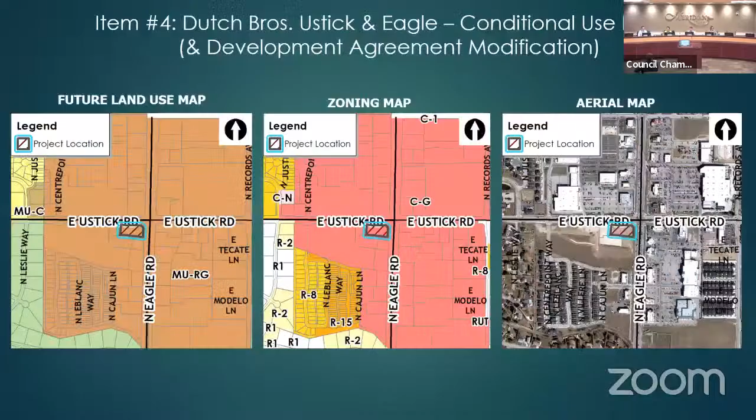Thank you, Mr. Chair, members of the commission. Happy New Year to all of you. Glad to be back here. I'm excited about all the community members in attendance tonight as well. It looks like it's going to be a pretty quiet evening, so you get stuck with me tonight. I'm covering both Sonia and Stacy's projects as they're out enjoying a vacation and a much needed evening for Sonia. She was at City Council, it was a long hearing, so I told her I'd take Cigar Canyon for her as well.

So first item on your agenda, this was continued from the December 15th hearing because of a noticing issue. That discrepancy has been corrected, and so it's back before you.

The applications before you this evening are a conditional use permit and a development agreement modification. As you know, because there is an associated development agreement modification with this conditional use permit, you are a recommending body on the conditional use permit tonight. So you will be making a recommendation to council to accompany that DA modification. This application is contingent upon council approving the development agreement modification.

The site consists of 1.2 acres of land currently zoned CG in the city, and it's located at the southwest corner of North Eagle Road and East Ustick Road.

The applicant was in front of council about 6 months ago on a DA modification, and that one was denied. That's what's predicated this new DA mod and this conditional use permit. That was one of the recommendations from city council - they had a hard time justifying approving a concept plan with a drive-through on it without having the associated CUP to go along with it to see if it actually works on the site. That's why you see both of them concurrent tonight.

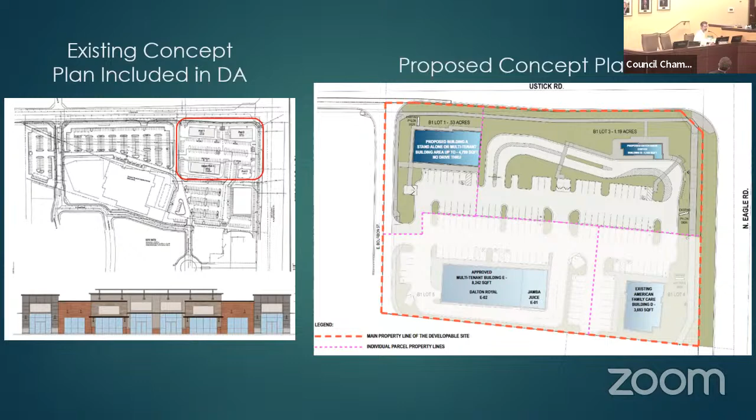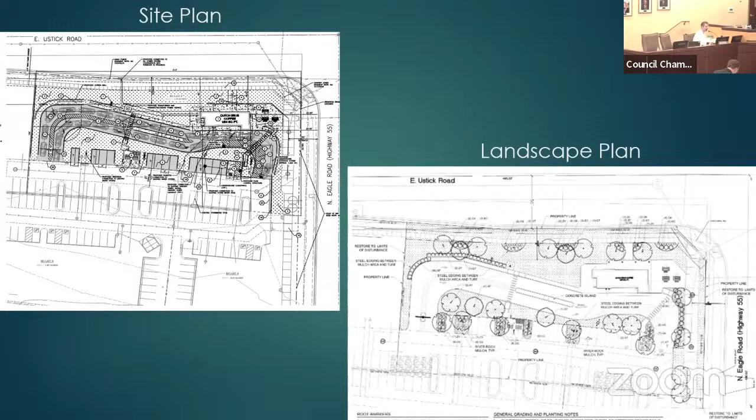The applicant did provide a landscape plan associated with this development. During our pre-application meetings with the applicant, we wanted to make sure, because this is a prominent corner, that if we did have a drive-through with a substantial amount of asphalt, additional landscaping or berming was done along the street to minimize the impacts of cars stacking as they waited to get their coffee order. So the plan here shows some additional landscaping. We've also conditioned the applicant to provide additional screening and landscaping. They need to do a little bit more, and staff will look at that with the certificate of zoning compliance and the design review application that will follow after the proceedings tonight, or after city council acts on the application.

So here are the proposed elevations. Again, these will be required to comply with the city's design standards. Pretty typical elevations to their new prototype. If you've had a chance to go by the Costco site, you probably see the same model or the same building elevations up there as well.

I had a chance to look at the public record before the hearing tonight, did not see any written testimony on the subject application. Again, staff is recommending approval with the conditions in the staff report. With that, I'll stand for any questions you may have.

Great. Thank you, Bill. This time, would the applicant like to come forward?

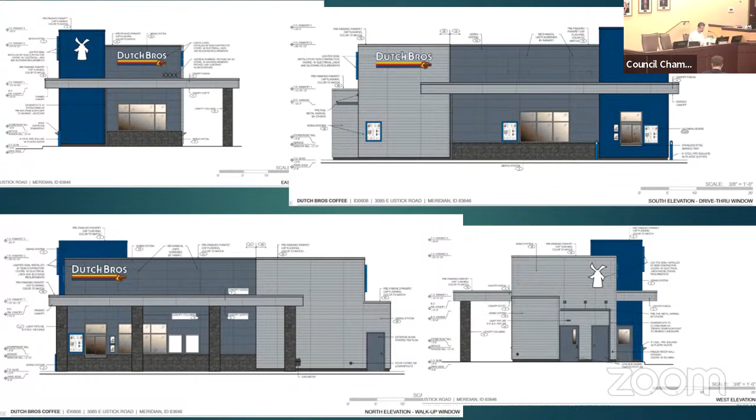Nick Wecker, senior planner with Barghausen Consulting Engineers, at 18215 72nd Avenue South, Kent, Washington. I'm here representing Dutch Bros this evening to walk you through our proposal and the changes made since the last hearing six months ago.

This is the corner we're looking at, Ustick and Eagle Road. Previously, the proposal was denied because the commission was concerned about 3 drive-throughs on the site. We've eliminated one of those at the northwest corner, which will now just be a standalone multi-tenant retail building, 4,700 square feet, with no drive-through proposed.

Of course, the Jamba Juice drive-through was approved previously and has been constructed, as well as the American Family Care Building D at the southeast corner, which has also been constructed.

Part of our proposal tonight is to seek approval for a conditional use permit, in addition to the DA modification, allowing an additional drive-through at the northeast corner — a 1,100 square foot Dutch Bros Coffee.

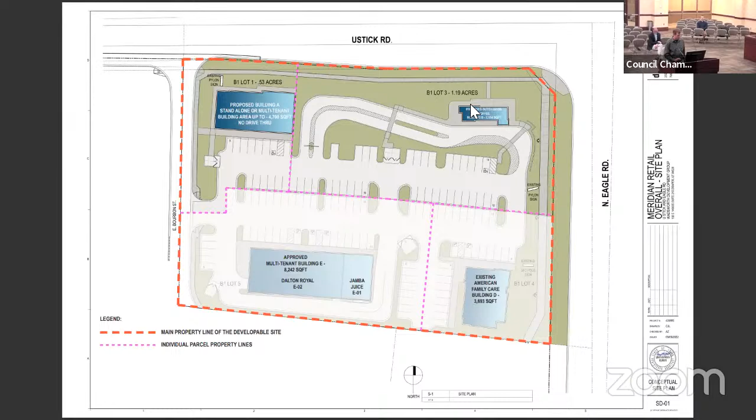Here's the original concept site plan for the development agreement, originally prepared by Kimley-Horn. This shows the other half of the property to the south, which depicts a regional commercial center.

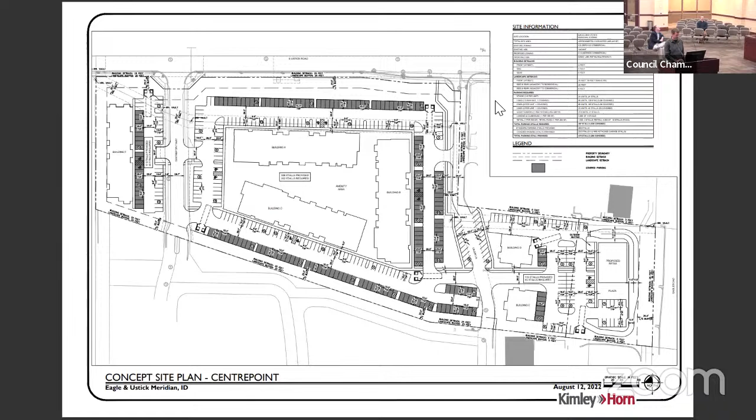Recently, an apartment was approved at this location, which will substantially reduce traffic considerations for this corner — by approximately half, according to our traffic consultant's estimate — as a result of replacing the previously proposed regional commercial center. We're including that here as the second half of the master development at this corner.

This shows the original concept development agreement for our northeast corner with the pads. Pad 4 and pad 3 are already constructed. Pad 1 and pad 2 are what's being proposed for modification tonight: pad 2 would become Dutch Bros, and pad 1 would be the 4,700 square foot multi-tenant retail building with no drive-through.

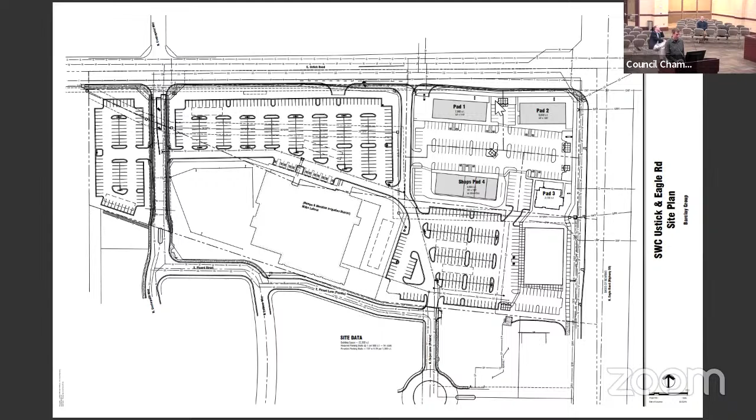Here's our detailed site plan, which shows the patio space more clearly than the first rendering. It shows a fairly large patio space oriented to the street corner, set back a little ways, with access to the right of way and a short screen wall or hedge — details we'll work out with staff on design.

That's also the side where the customer walk-up window is, so pedestrians coming from the right of way will be able to enter that walk-up area without crossing the drive-through lanes. This site plan also shows 26 vehicles within the queue.

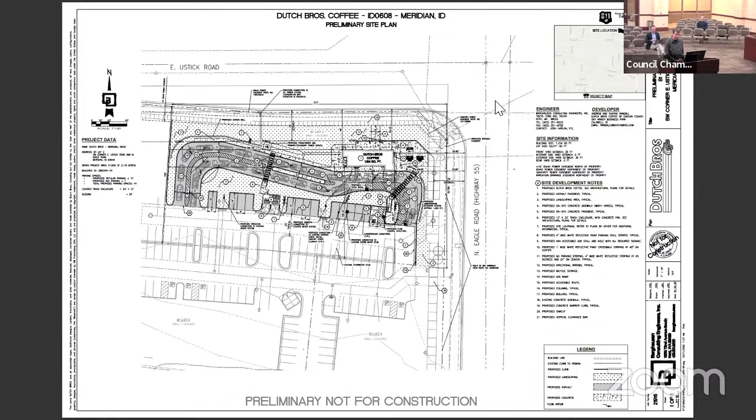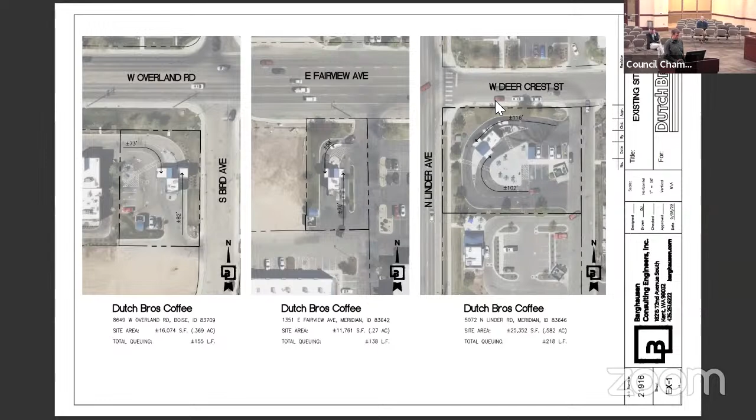So we have the Overland location with 155 linear feet of queuing, compared to over 500 feet for the proposed new Dutch Bros we're reviewing tonight. The Fairview location is 138 feet, and Linder is 218. You can also see the driveways in proximity to the queuing entrances for these sites, which has created concern and spillover. Our site plan today is meant to show that that's going to be alleviated, not a concern.

Like I said, we're at 524 linear feet of queuing, which is 2 to 5 times what exists at some of the older prototype locations in Meridian. The queuing entrance is also well off of the primary driveway to the center. So even if there's spillover, it's not onto the right of way. There's going to be 26 cars that could fit in this queue.

That's the next closest—other than Ten Mile and Chinden—the next closest for existing locations is 11. So we're going from 11 to 26 in this new model, which is similar to the Ten Mile and Chinden location, where we have not observed any major queuing impacts.

I should also mention the escape lane. We'll have an escape lane striped on here that also allows customers to exit before they even get to the window. So when the employee takes the order from the vehicle, sometimes the car third in line might only have one drink, while the cars in front might have 4 or 5 drinks to be made. That vehicle would be able to exit via the escape lane without having to wait for the window.

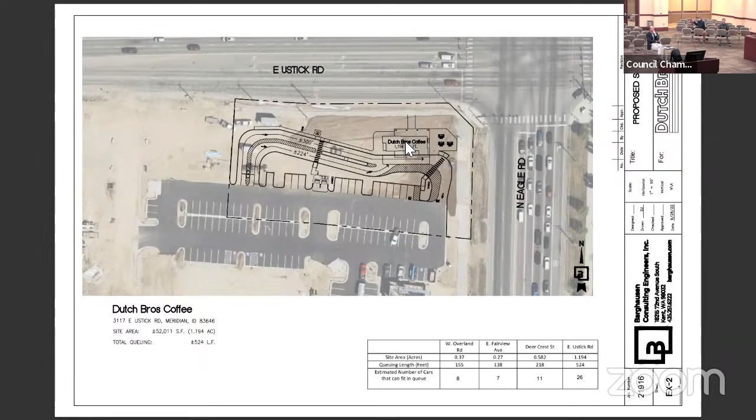Thank you very much. And with that, we will continue item number H 2022-0027 for Sagarra, and we'll begin with the staff report.

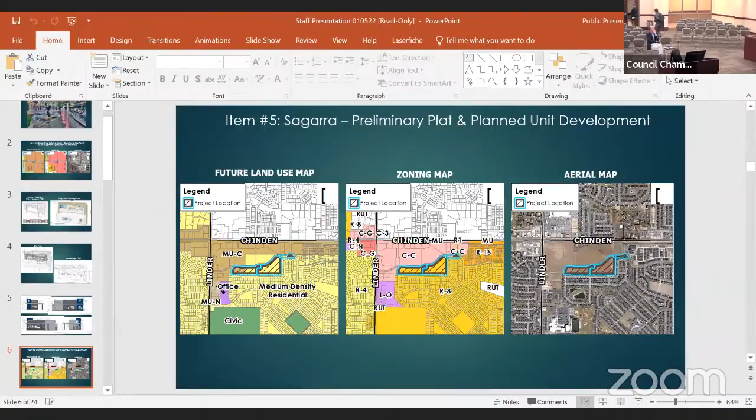Chair, members of the commission, the next item is also a continued item from the December 1st Planning and Zoning Commission. I won't go into all the details of this project because it has been continued. If you recall, I think two of the major sticking points for the commission were regarding qualified open space and parking were the two items that came up quite a bit at that hearing. You had instructed the applicant to go back to the drawing board, meet with staff, and come back with a resolution to those two items.

I'm happy to report that those items have been resolved, and the applicant's open space and parking standards do comply with UDC standards. So there are no exceptions being requested to the parking standards or the open space as originally thought in the initial staff report. Sonia updated the staff report to reflect that as well, so everything should be in line for tonight's proceedings.

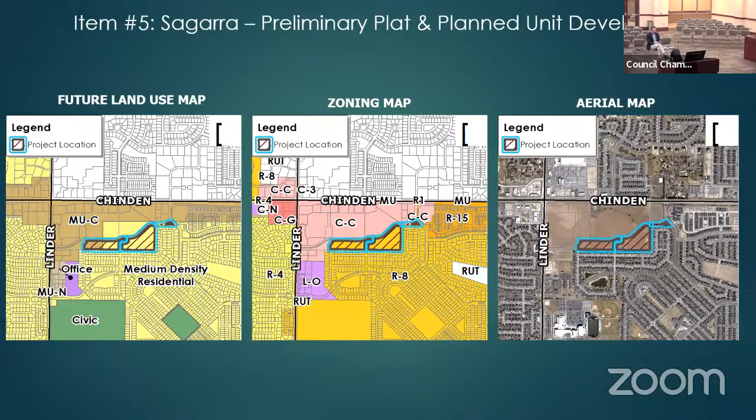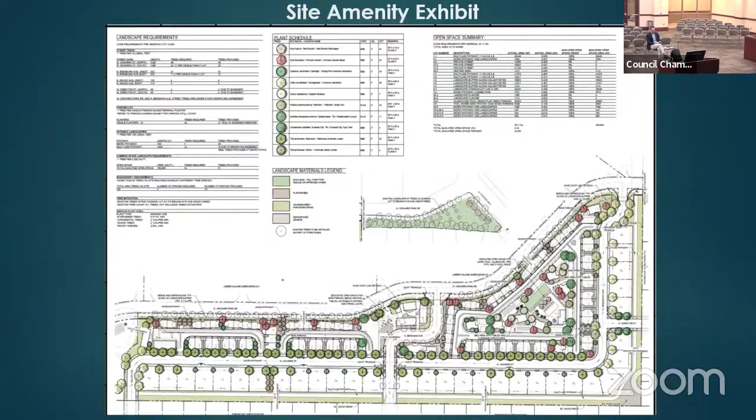If you'd like, I'm happy to go to the open space exhibit so you can look at that revised exhibit here real quick. See if I can read it here. I believe that was the open space exhibit. This was explaining when it's coming online and what was counted. It's hard to see at this scale, but looking at Sonia's notes here, it looks like there's actually 3.43 acres of qualified open space.

Also, one of the items we brought up during the previous staff report was that linear open space along the south and east boundary. Happy to report that the irrigation district has given the applicant their approval to amend their license agreement and actually install the landscaping and required trees per city code. That allows the applicant to enhance that and integrate it better with the development without having to lose land area, while still providing the landscaping the city code requires.

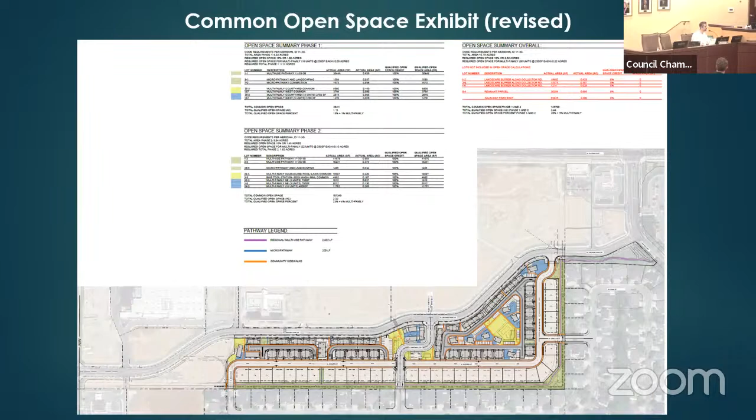And I think that's probably what really got us over the hurdle, is just understanding how that was going to work and whether or not the irrigation district would allow the plantings.

We had also talked about this at the last hearing — parking, particularly on-street parking in the curved areas. The applicant has stated, looking at the parking calcs based on the revisions, it looks like they're still 16 spaces in excess of what code requires. This exhibit shows 122 on-street parking spaces. But if this body wants the applicant to not allow parking on some of those curved areas, I'm sure that number would go down. Again, they're in excess of UDC standards, and the on-street parking is a bonus — it's just in addition to what the code requires.

Had a chance to look at the public record. Didn't really see any new testimony or anything to add that wasn't already discussed at the last hearing — again, concerns with density and development in general. I do recall at the last hearing some neighbors had concerns about the fencing that was damaged during the tiling of the ditch along the south and east boundary. I know we had preliminary discussions with the applicant, but I don't think we've come to a resolution on that. So if that's something the body wants to discuss with the applicant, I'd recommend you do that this evening as well.

Again, staff is recommending approval, and I'll stand for any additional questions you may have. Great, thank you very much. Would the applicant like to come forward?

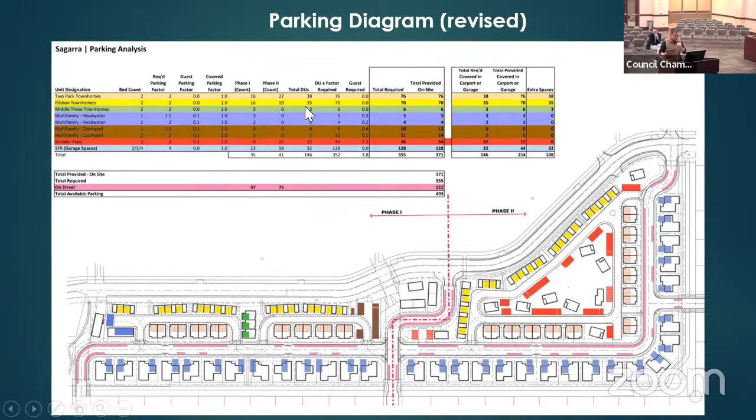As Bill loads that, I just want to note that he's covered most of the things. I'll make the presentation pretty quick and simple. We've been working really closely with the neighborhoods and some of the neighborhood representatives.

To address parking first, I met with Sally. She's not the official representative, but I think she's kind of leading the charge, and a lot of the neighbors listen to what she's saying. We've been working together on solutions about the fence. I think the fence is a big issue for them. Sally and I have come up with a couple of possible solutions for how to fix that fence. Us as the developers are committed to participating and paying for half, if not more, of the fence.

She and I are working together on a survey of everybody to figure out what certain people want—some people's fences are fine, others aren't. She's come up with some great ideas of what we can and need to do to get the fencing issue solved. So I'm actively working with her, and she's been really pleasant to work with. That's part of the process right now.

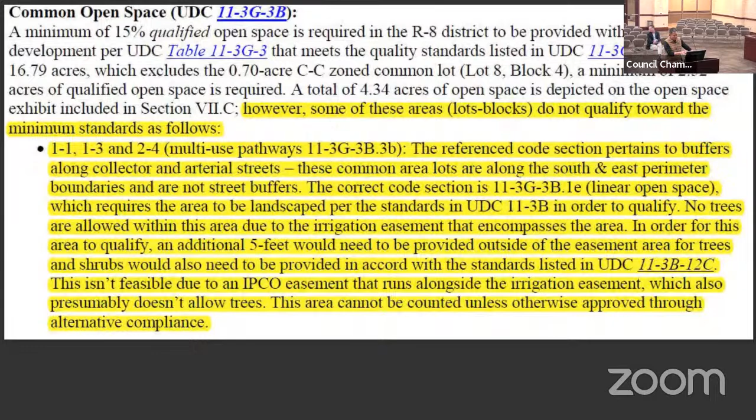I'll make this pretty quick. I think Bill has addressed most of the issues. So what I did was highlight some of the issues that were spoken of. This is what I first put up, the addendum to the license agreement with the Northern Slough, allowing us to go ahead and use that and plant the trees, columnar oaks.

They've already signed and recorded this document, so we have the right to—the new landscaping plan will show the columnar oaks being planted, and they've approved that type of tree. It's a more non-invasive root system, and they're okay with that type of landscaping.

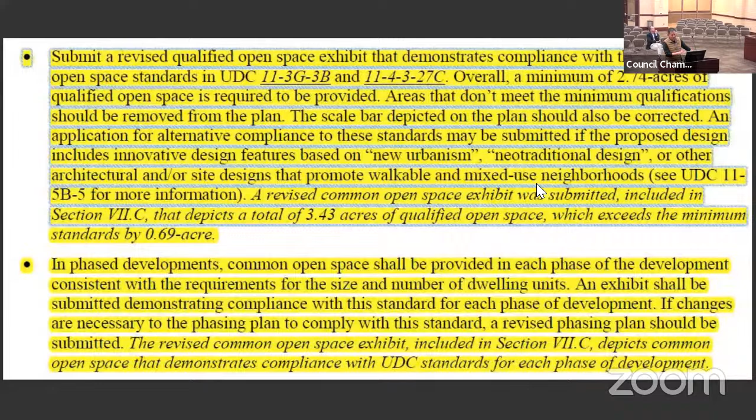The next thing is the open space. As Bill has explained, I'll breeze through this. A lot of the issues with open space were about doing the right calculations. If you look at the calculations—the next page is going to take a while to load, it's kind of a big file—what I did was highlight each section, and each phase will stand alone and qualify above the 15% open space. Together, we're above 20.

One thing I want to point out is that in some of the exhibits there's a 2-acre park directly adjacent to the development that we're not counting. It's across the street. It's part of the overall Orchard Park development that we plan on improving.

The original idea from the neighbors was a dog park, and then some neighbors decided they didn't like a dog park. So Sally and I discussed doing a survey of the neighbors to see what they want. I prefer a dog park, but if the neighbors don't want one, we'll do a regular park. That's the second thing I've been working with Sally about—how we approach that park itself. It's 2 acres, and we have control of it.

It's not part of the Sagarra development, but it's part of the Orchard Park development, which we're all involved in. We're working directly with the neighborhood to make sure that whatever gets put in there is something everyone enjoys. Let's see if this will load now—still not loading.

Also, there's a couple of parcels there—an extra remnant parcel that we originally included in our open space that we're no longer including in our calculations. We don't need it. So without all the staff recommendations, we're still about 20%, a little over, I believe. And if you add the park, we're well in excess of probably 30-some percent.

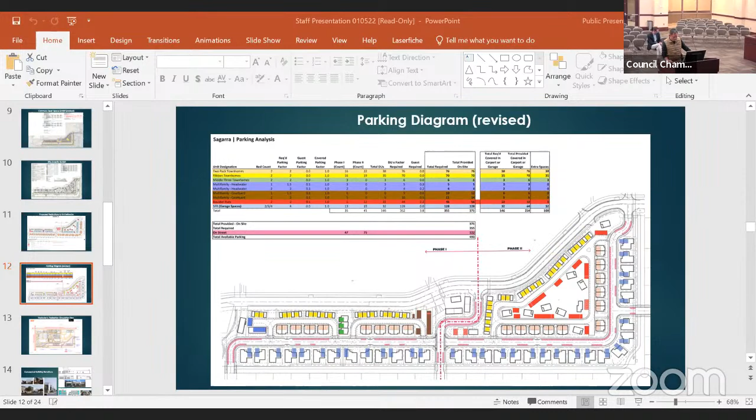So is this yours or is this? Do you have the 0 lot line exhibit that we submitted? Because if not, it's on the back of mine. Yeah.

Yes, there are 0 lot lines, but the intent wasn't to push everything to the edge. Once you see the exhibit, it's for articulating the buildings, to create a little more so they're not straight buildings. They articulate, so the corners of the buildings have 0 lot lines, and there's probably, give or take, once we pull up the graphic, 7 to 10 points where the lot lines exist. Put it up.

Last exhibit here. I think it's still trying to load. It's a big pop. So you can see the little red marks, and that's where the 0 lot lines exist.

So just to clarify, it's not to create a 0 lot line everywhere so we can cram the buildings to the edge. You can see how the buildings are articulated. We'd hate to lose the design function because of these points, but if we really have to, I guess we can go redesign it and straighten the buildings out a little bit more. We just thought it was a good architectural feature to make it so it doesn't look like rows and rows of buildings.

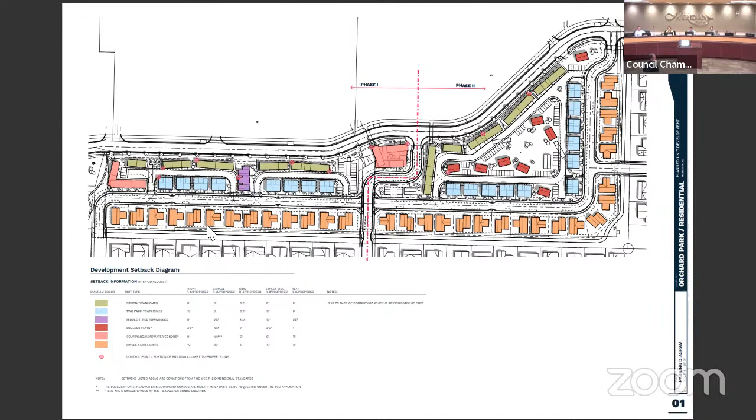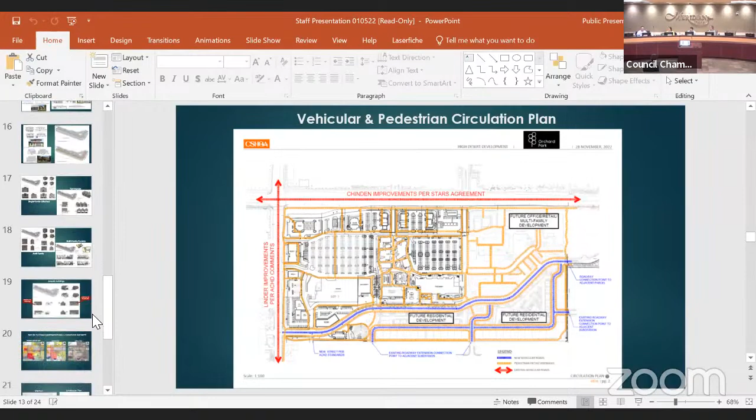I'll try to quit looking directly at you like you're going to say something directly after you've recused yourself. So I realize I'm doing that and I'm like, no, he's not going to speak.

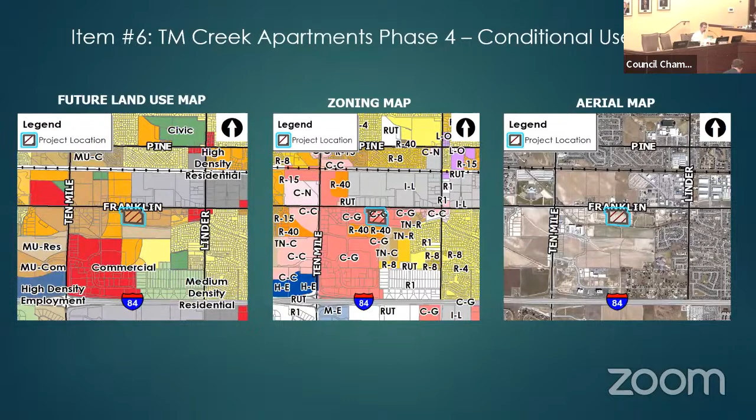So those do not require a conditional use permit in the CG zone, they're principally permitted. In working with the applicant, we broke this project into 2 phases. Phase 1 was the staff level approval to get all the parking and those 2 structures under construction. Then they were going to come back and do the CUP to finish out the open space and the 2 additional buildings and the clubhouse and amenities associated with the overall 7-acre development. So that's really where we're at today - that's why you see a site plan larger than what you're really reviewing as part of the CUP approval.

The CUP itself is for 2 buildings, 4 stories in height, actually 64 units, a mix of studio, 1, 2, and 3-4 bedroom units ranging in size from 656 square feet upwards to 1,443 square feet, at a gross density of 28.6 dwelling units to the acre - consistent with what was required as part of their development.

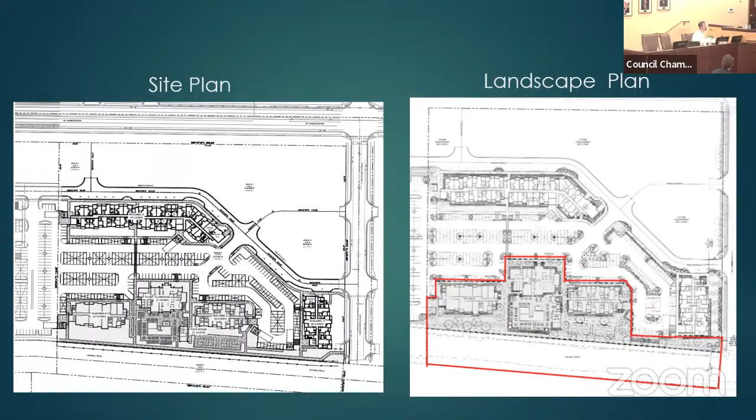If you had a chance to review the staff report, staff had questioned the open space. The question wasn't whether there was adequate open space, but whether the number reflected to this body was accurate, because we didn't want to give the impression this site has 65% open space. When you look at just the 2.43 acre site, it has 65% open space because there's no parking associated with that acreage - you take out the building square footage and everything else is open space. So it makes sense, but looking at this in conjunction with the vertically integrated project, if we look at the entire 7-acre site, there's approximately 32% open space overall between these developments.

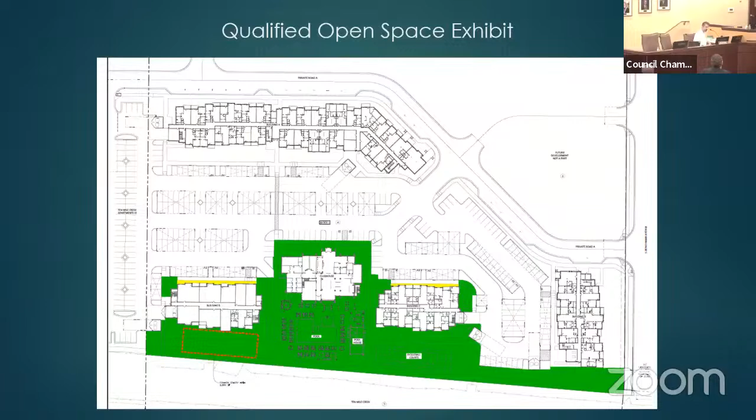This development will be sharing amenities with the vertically integrated portion as well. One thing I appreciate working with the applicant on these projects is that each of their multifamily projects are standalone - they have their own open space and amenities to go along with the density proposed on their sites. As I mentioned, the architecture is similar to what's currently under construction or constructed in the area, though a lot of these do have their own identity as well.

So there's always a mix of materials. As I mentioned, because they have their own design guidelines, the applicant provides us a letter from their design review board verifying that the design's been approved. That way, all city staff has to do is review it for conformance with UDC standards. It's been a pretty good partnership with the applicant doing that process. It's actually the first time we've done it with somebody in the city, and it's been working out pretty well. They handle the design review and we just make sure they comply with code.

So it makes it easy. Had a chance to look at the public record, did not see any public testimony on this. We did receive written testimony from the applicant and they're in agreement with the conditions of approval. With that, I'll stand for any questions you may have.

Thank you very much. The applicant would like to come forward.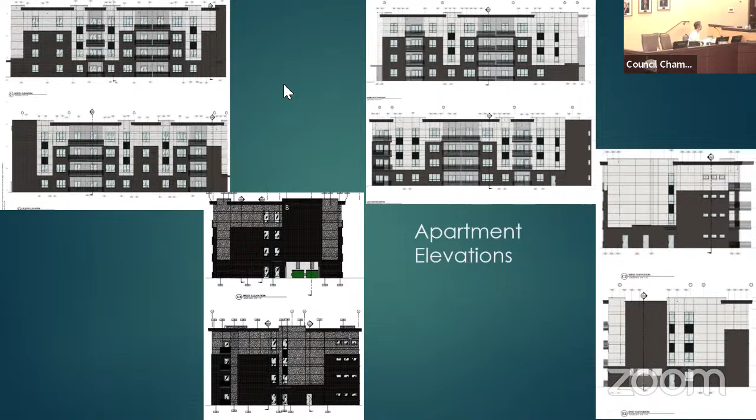Good evening. Happy New Year. For the record, my name is John Wardle with Brighton. My address is 2929 West Navigator, Meridian, Idaho, 83642. I did raise my hand here so that I could present. Maybe, Bill, you'll have to undo yours. Oh, thank you. Let's see here. Can I be raised to? It's perfect. All right, make sure you see that on your screen.

Perfect. I will say at the very beginning that we are in agreement with all the staff conditions. We don't have anything to modify on the conditions before you. I do have just a couple of points.

As Bill mentioned, we have 2 projects here that are really one project, but the way they've been reviewed, they're one project together, but 2 different applications. From a context perspective, this represents the location of the TM Creek Apartments Phase 4.

We currently have Wayfinder built, which is east of 10 Mile. We also have just finished construction of Benchmark Road down to 10 Mile Creek. Over the winter, we were going to be building another bridge crossing. And then next summer, we will complete Benchmark and Cobalt. So we will have a complete collector system at the 10 Mile project so that everything connects to Franklin and over to 10 Mile Road.

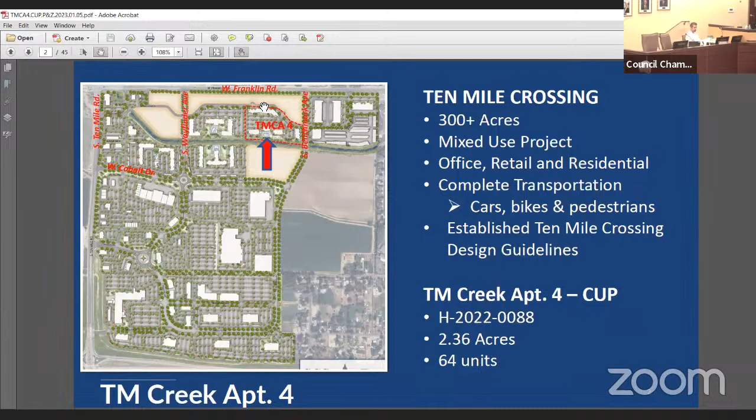We have currently built an access drive aisle paralleling Franklin, and we will continue that on this project. As it shows right here, there will be a parallel roadway connecting over to Benchmark and to Wayfinder. We will have a right-in, right-out access eventually onto Franklin Road here in the center point, but the full access points will be at Benchmark and on Wayfinder, and those will both be signalized in the future.

Benchmark is currently signalized. We've actually paid for all the signal for Wayfinder, and that's in ACHD's court to install, but we anticipate this next year. In 2023, we'll have 2 signals operational there.

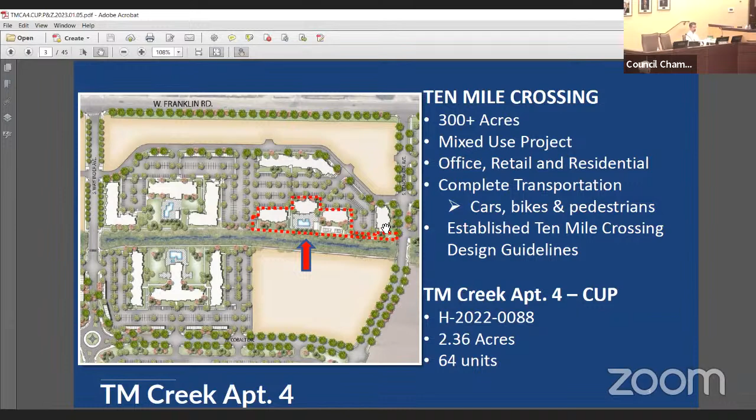Overall, 10 Mile Crossing is 300 acres. This site, specifically the CUP in front of you, is 2.36 acres, highlighted here in red. But the whole project, 10 Mile Creek Apartments Phase 4, is a total of 7 acres. This is showing the entire project together.

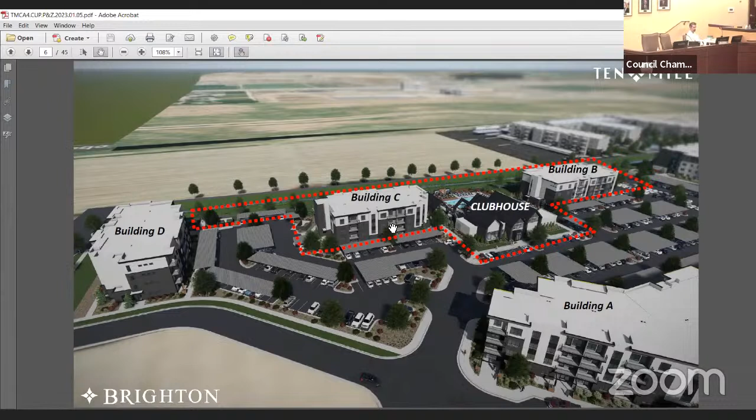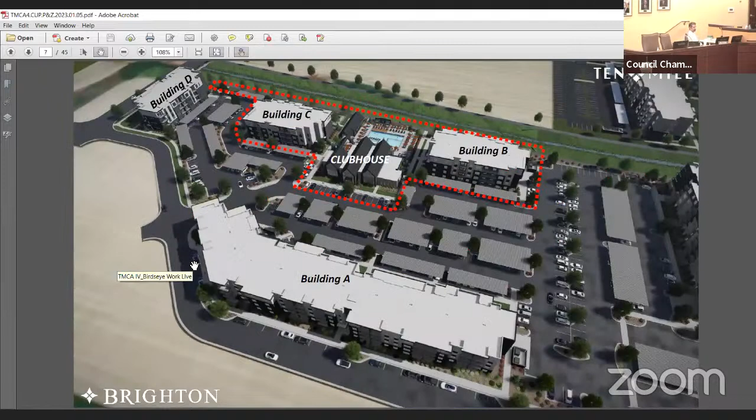Just a couple of illustrations here. This would be looking south as if we're standing over or flying above Franklin Road, looking south towards the interstate: Building C, the clubhouse, and Building B. We also have Building A and Building D, which were previously approved as vertically integrated. Another view of the different types of buildings that are here.

The CUP application in front of you tonight is 2.36 acres. On this specific site there is 1.51 acres of qualified open space, which is 65%. As Bill mentioned, that seems high in the overall project—we actually have 32% open space overall.

The amenities we are providing that all of the uses here will have: a clubhouse, which is 11,000 square feet of conditioned space inside. We'll have fitness, gathering spaces, workspaces where people can get out of their apartments if they want to and have dedicated workspaces like we see in some executive spaces.

We will have a standalone pool house, shown here off to the south and east, which is 1,000 square feet, with some outdoor spaces as well. Above, on the second floor, there's a second floor sun deck. Around the pool, there's pool and spa. We have 2 pickleball courts. There's seating and fire pits.

We also are building an 8-foot parallel sidewalk. The regional pathway is on the south side of 10 Mile Creek, and we've built that with 1 phase already and will continue that along. On the north side, we have installed, or will install with phase 3, an 8-foot sidewalk right now, and we will continue that along. It doesn't replace the regional pathway, which we are committed to building—it just provides another way for residents to move east to west along this corridor and provides more connectivity throughout.

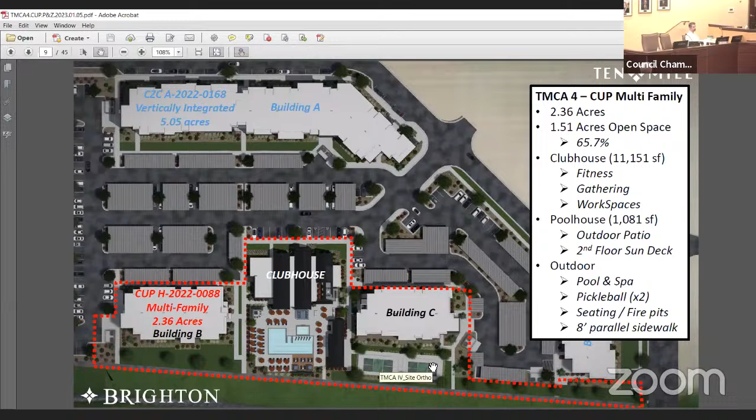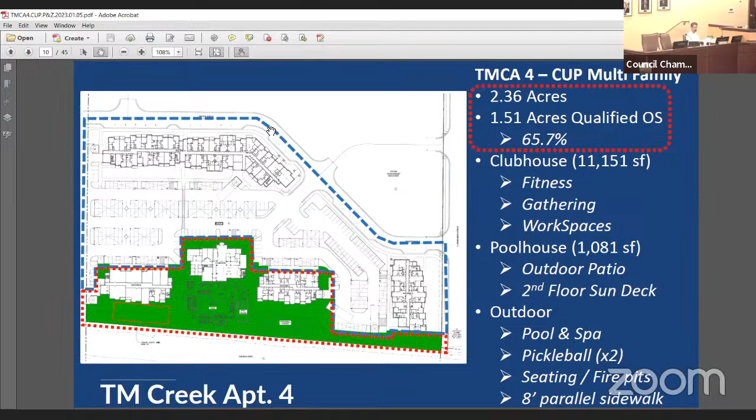Again, the amenities are for the entire project. The area highlighted in red is the CUP. The area highlighted in blue, or banded in blue, is the vertically integrated space. This gives you an overview of the overall open space for the project.

At 32.5%, or 2.41 acres of the 7.41. I do want to note that there is the 10 Mile Creek corridor, which will have the regional pathway. That's not included in this calculation. That is a separate open space. When we bring in the plat, which will be TM Creek Phase 7, it will include that. But we are not loading up this project with that open space of the creek and the regional pathway.

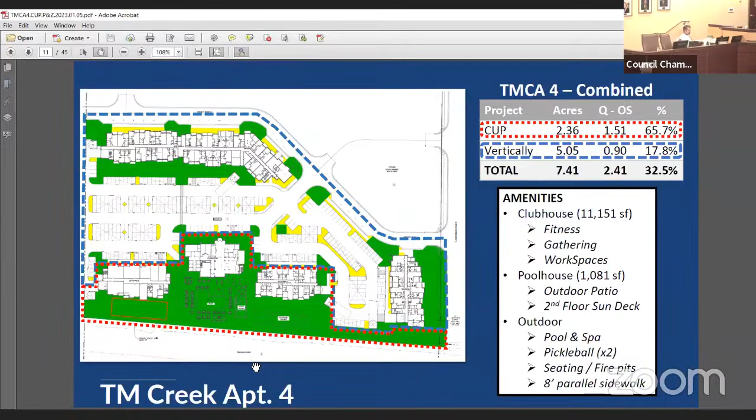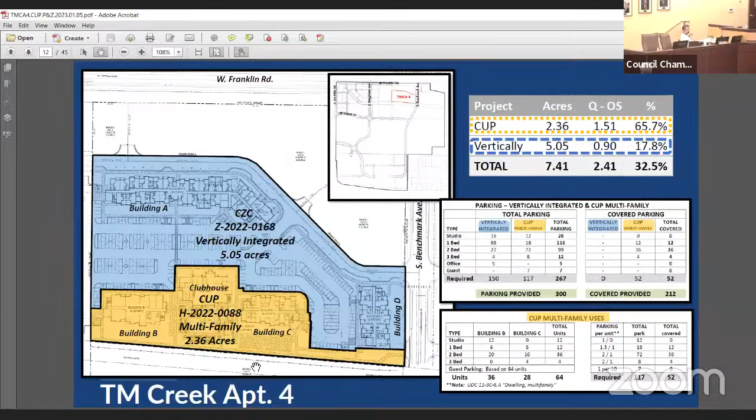We previously submitted for vertically integrated and provided the city with all of the parking in one package so they could see it, even though the CUP had not been provided. The required parking is 267 spaces. We have an overall 300 parking spaces. We would only be required 52 covered spaces, but 212 of the spaces here are covered. So a lot of the parking on the site is included, and we do exceed the parking requirements. We more than exceed the parking requirements for the projects here.

And that's what we've done here as well. We have brought the amenity down to the sidewalk and to the creek, and brought these two buildings down as well. Pickleball, as we know, is a popular activity, and we are providing 2 pickleball courts with this project as well. Just an aerial view looking down at the site, the pool area, clubhouse area.

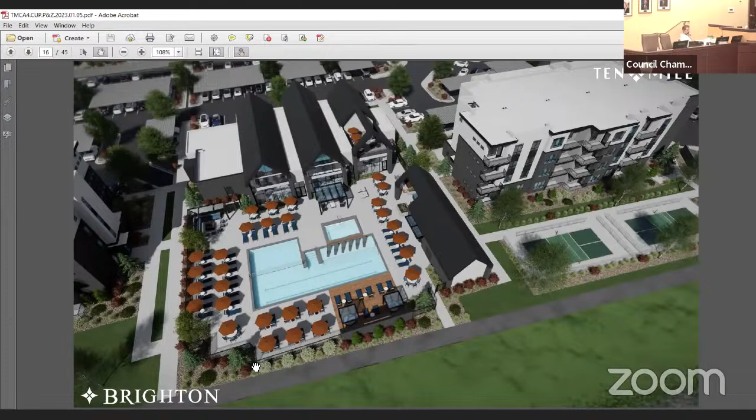Do you have any questions for the applicant or staff? None? I don't think there's anybody left online, and I'm pretty sure you're part of the show. So if there are no questions, nothing further to add. All right, thank you very much, sir. Appreciate it.